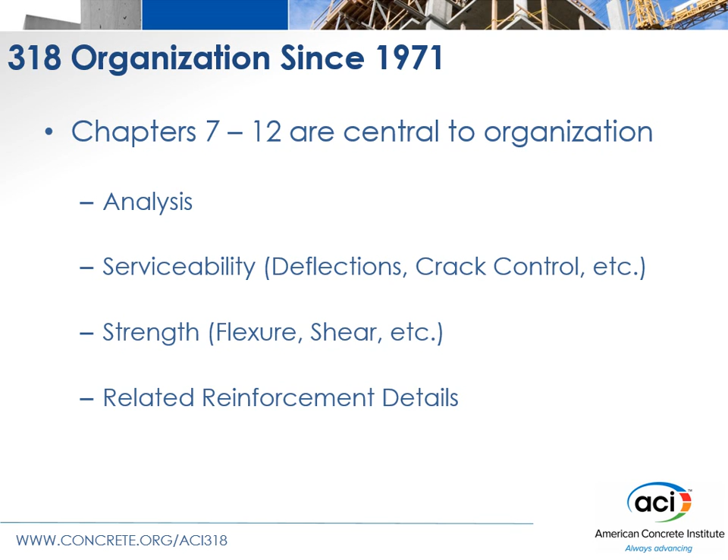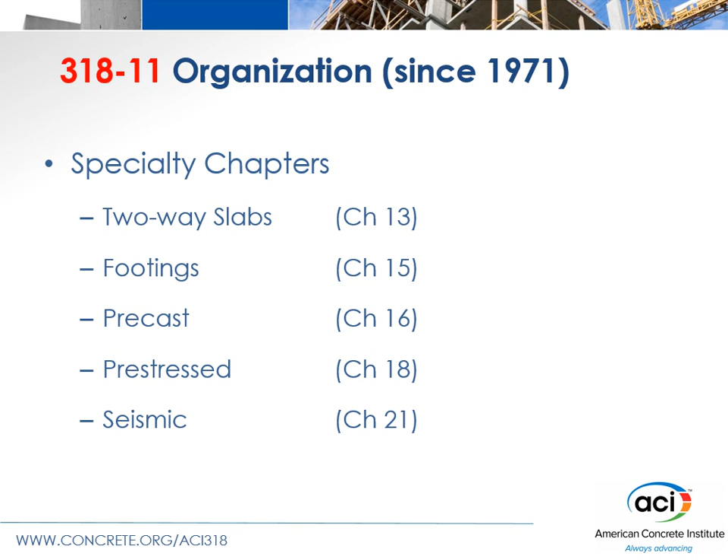As you know, from '71 forward through the 2011 code, the central chapters were 7 to 12. We had analysis, serviceability, strength, flexure, shear, and related reinforcement details. In the specialty chapters, we had separate chapters on two-way slabs and on footings, so we had some structural member design chapters, but then we had different chapters related to various construction techniques, certainly for cast-in-place concrete, but we had separate chapters on precast, on prestress, and a separate chapter on seismic. So we really had, up through 2011, kind of a blend of ideas where we're looking at types of construction systems, behavior, and member types.

So a couple of major goals in reorganizing 318 were to develop an organization that followed the design process. We wanted the user to be able to find the information quickly. And the other thing is we heard that designers particularly wanted to increase the certainty that a design fully met the code. So how do we do that, particularly when you have provisions that are spread out throughout the code?

So the heart of the 318-14 organization is what we're terming loosely a member-based code. The member chapters are in order and have a very similar design feel to them. We have one-way slabs, two-way slabs, beams, columns, walls, a new chapter on diaphragms, foundations, plain concrete members. So that is really the heart of this new 318-14 organization.

And one of the things that ACI staff has prepared are transition keys. So if you have provisions, particularly in notes that you designed by, there are transition keys that will take you from 318-14 back to where you can find those provisions in 318-11, and vice versa: 318-11 will tell you where they're at in 318-14. Those are free for downloading on the website, and I would certainly recommend that you take a look at those. That will be helpful, particularly in class notes, where you referenced a provision and you want to now find it in the new code.

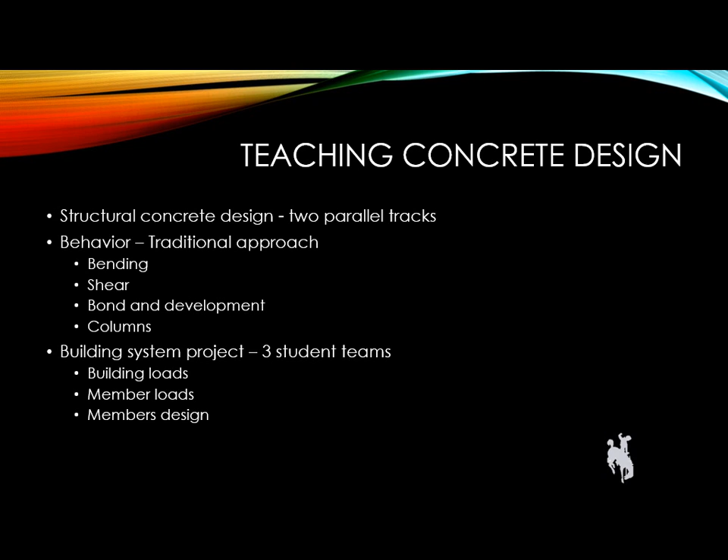To make it work, what I do is I put together a project that requires the students to develop the building loads first, then the member loads, and then to do the member design. And I do it this way because they can be doing the loads while I get far enough along with the flexure part of the lectures that they can actually do something in concrete. And those of you that teach a course know that you've got to get in 2 or 3 weeks before you can begin to do reasonable homework problems, and the students have enough background.

So, as Randy pointed out, the material in the toolboxes, the back chapters, are where you're going to find bending, shear, axial load, the fundamental behavior parts of the code. These are now in Chapter 22. I actually teach reinforcement before I get to serviceability, so bond, development length, cutoffs and stuff are in Chapter 25. Chapter 24 is serviceability. So we're working through this in the project that I do, then serviceability checks come dead last in the process. The next thing I need to do is look at a project. And so for this part of it, I take a building, in this particular case, it happens to be a hospital down near Loveland, Colorado, that I watched go up.

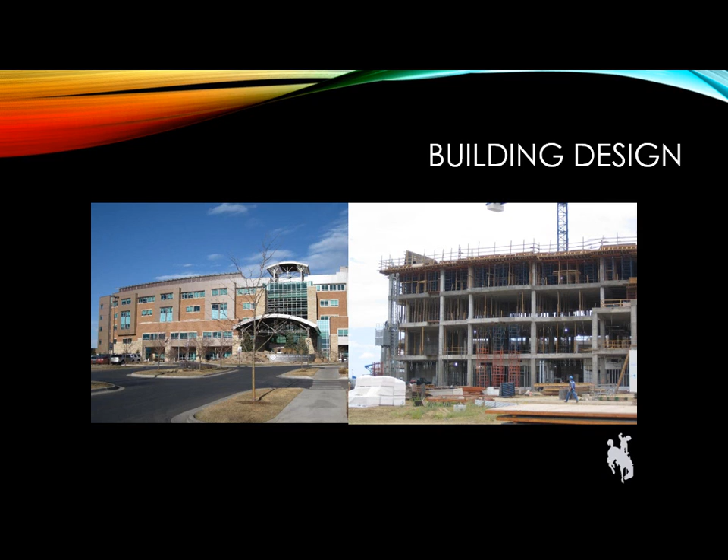We talk about what a building looks like at the end, and fortunately, I was there at the beginning, so we have a series of pictures of the construction of the building. And so the students learn slabs, beams, what these different members do, and a little bit how they go together. So that's kind of the beginning.

I then start dumping this design project on it. All of the students don't like this one because it's a lot of work. Students, not to worry, it's a lot of work for the faculty to grade it too. So we'll go through that.

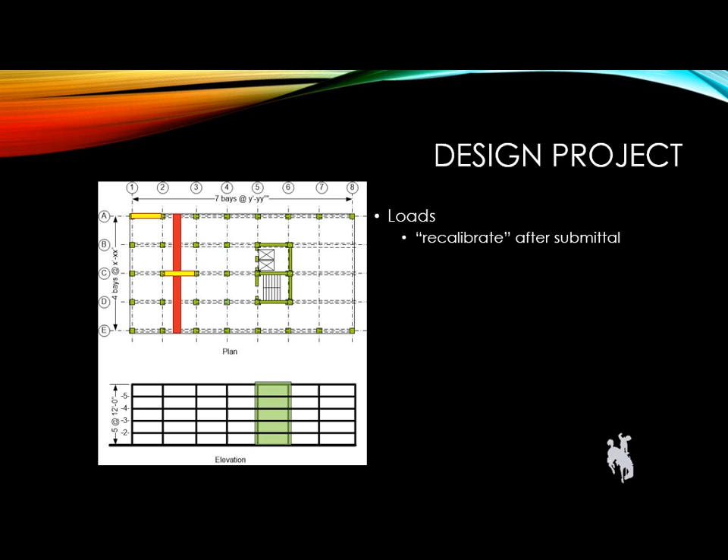Part of the calibration is they have to estimate sizes, so they have to get slab sizes, beam sizes, and all of that, which accounts for some of the variation. Then they do the one-way slab, and I have them use the ACI moment coefficients. A, they haven't had indeterminate structures, and B, I want them to know that the moments add up to at least wL squared over 8. And that's a great surprise to some of them.

After the one-way slab, next I do the beams. I do a couple of typical beams. I take an interior one because it has the two end moments, and then I'll take another one up in the corner that frames into a column, because I'm eventually going to have them look at a column.

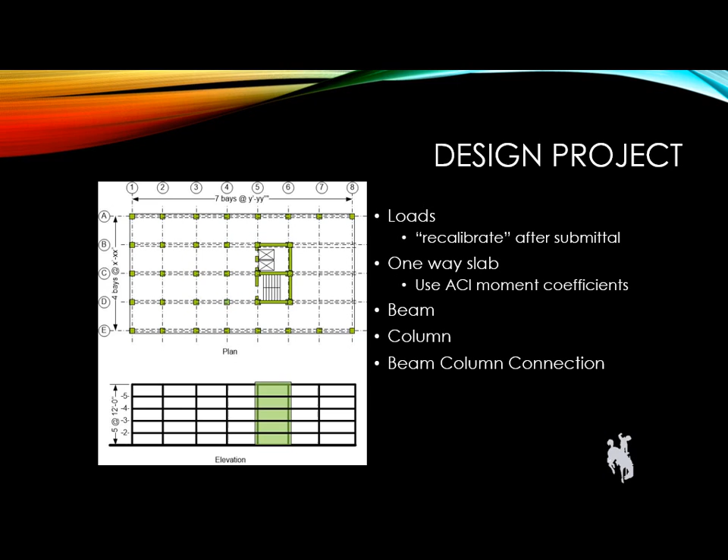For the column itself, I typically take a corner column, and again with a one-way slab, I've got one-way bending on the column, and they've got to work through where the loads on a column come from. So then I have a column that has axial load and moment on it, and we'll look at the column two or three floors down because the top one isn't as much fun.

And I have them do a beam-column connection, so they have to figure out how to get the steel into the column, how to bend it because the column isn't big enough. And they work through all of this. And depending on where I am in the semester, I have them do a simple spread footing so that now they've seen the entire building.

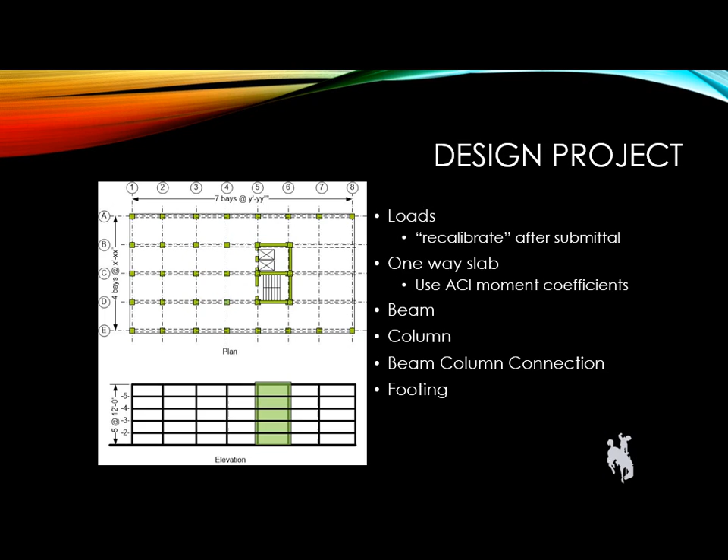From the overall picture, no good deed goes unpunished. I have about half of A through K to report on: complex projects, theory to practice, all of this stuff. But that project gets you into being able to address a number of the ABET requirements.

The member chapters in the new code are going to be a real godsend to this. Since I didn't have the member chapters when I was doing this, everything kind of got put together. With the new code, the students are going to be able to take each one of these pieces they have to do, go to the code, go from A to Z, check off each step, and make sure they have all the parts done. So I see this as a major benefit of incorporating the code into the class.

Grading a project: if you're a faculty member and you're saying, how do I grade 40, 50 individual designs? What I ended up doing was a peer review within class. They pass in all their reports on each submittal, I pass them back to a different group, I give them a checklist and say, grade it for me. And I will post on the board or give a handout of approximately where the answers should be. And so I expect them to come back and learn.

One of the things that happens is by the last submittal in this class, they're starting to look pretty good. They've learned what real garbage looks like courtesy of their colleagues, which the faculty know, but the students don't always see. And in my own case, I have a MathCAD program where I just change a few parameters each time and it gives me the full set of solutions.

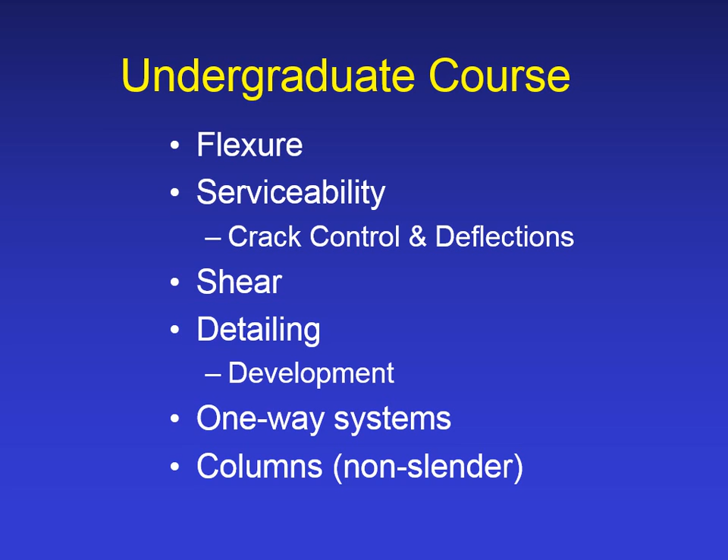And then finally, at the end of the semester, we really have about a week or 2 weeks to cover columns, and we only do non-slender columns in that portion. Slender columns are held for a graduate level course. So going back into this, one of the first things that you introduce to the student is the materials. And you say, hey, here's the concrete and here's the steel.

So in the new code, we have these chapters that start at 19 once we pass the members. And the first one is concrete. The title's a little longer, but it's focused on the properties of concrete. I find that this code lays out very well into the way that you would teach the class, that you can get into here and start to tell them about f'c. The properties are defined. What's the E? What's the modulus of rupture? And if you're talking about lightweight concrete, there's your lambda. So it gives them that knowledge about the material and how we specify the concrete.

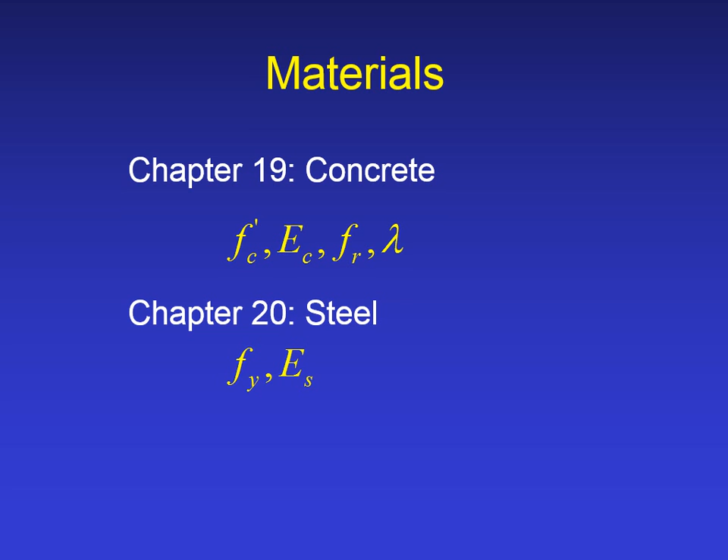Chapter 20 follows up directly with steel. This is where you have your fy, E of steel. If you're teaching a prestress class, it has your properties for the E of prestressing steel and some other material properties for the steel. So I think those two chapters are very good to go along with the material section of your course.

And then I'm starting to really get into flexure now. As I start talking about flexure, or these material behaviors, that's where these toolboxes come in, and I think, before just jumping into one of the member-based chapters, understanding that toolbox structure is very important to teaching the students how those toolboxes work and the behavior. As was shown already, we have chapters 21 through 25, which are kind of the meat of these toolboxes. We have the strength reduction factors, and sectional strength, chapter 22.

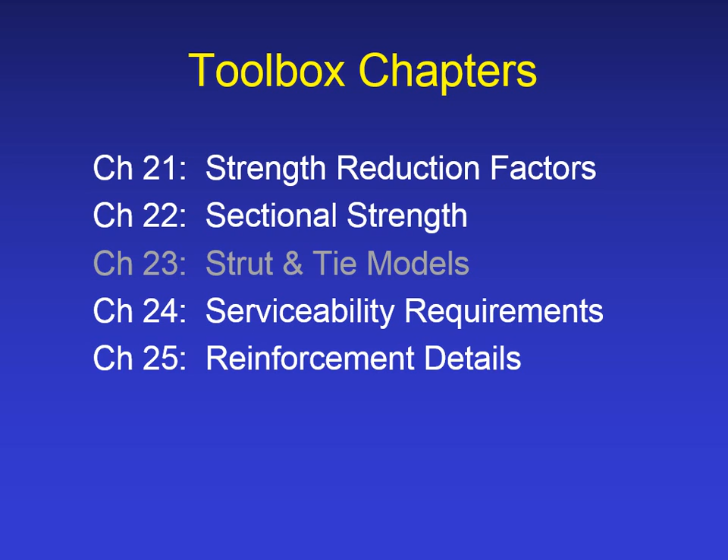And I just highlighted so we didn't leave it out here, but strut-and-tie modeling would not be covered, obviously, in the introductory course. But getting into serviceability, that's one of the major topics. And then the reinforcement details. So it follows very well along the typical topics that we would cover in an undergraduate course. So I wanted to get into just a couple of the chapters.

So as I'm looking now in particular at teaching this behavior aspect in flexure and shear, this Chapter 22 on sectional strength is just perfect because I have design assumptions. And in there, we're covering the design assumptions for moment and axial. And so that's where we're talking about the 0.003 strain and what are our assumptions that we use for design, which follows with 22.3, flexural strength.

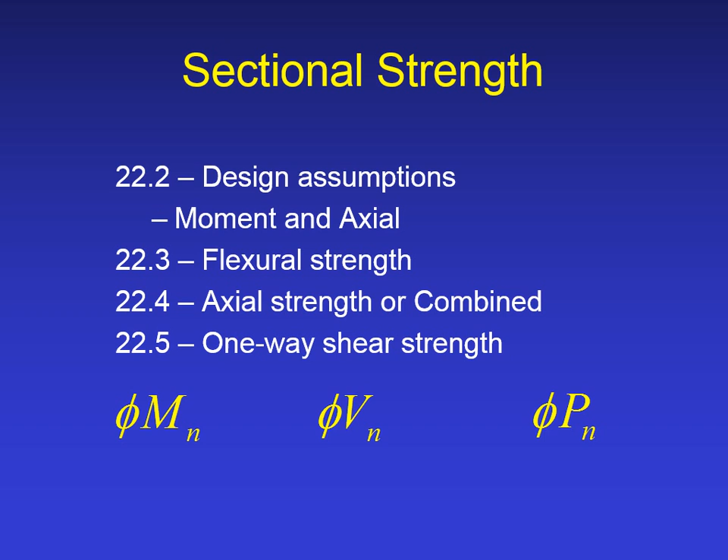And when I finally hit the columns, it has a section on axial strength or combined, where I'm doing my interaction diagram. And so again, understanding how to navigate this toolbox, I think, is fundamental. And then if you're doing shear, which is the one-way shear, which is going to be covered in the course, there's the section. So you go right into that, and now they understand how to get their nominal capacities, and then applying Chapter 21 right before for their phi factors.

The member chapters are great, as Charlie was mentioning, because now within one chapter, everything that they have flows together, whether I'm doing a one-way slab, a beam, or a column. So those are the chapters that will be used throughout this course, in particular when I'm getting to the design project, similar to what I think Charlie was indicating. So when I'm bringing in the continuity and how to put this whole project together, you can step through the one-way slab design, and all of the pieces from start to end are going to be there. For beams, the same situation. So the member chapters really guide the way for the students of how to design that member.

And I want to show a little bit of the details in that common outline. So all of the member chapters follow this outline. We start with the scope of the chapter and some general thoughts about the member. But then we get into design limits. So, for instance, how thin can the member be as a minimum if I neglect deflections? Any of these type of limits. And then the required strength. What are the moments that I have to design for? Mu, which is going to refer them to the appropriate parts of the code.

The design strength, the phi Mn, directing them now to the toolbox. So they understand now the interplay. So once they understand that toolbox, you can really navigate through these member chapters. And then the reinforcement limits. So minimum amount of flexural steel, minimum amount of shear steel, and then finally the detailing that's required for that member. So really an integral part of trying to do a project where you're designing the entire member.

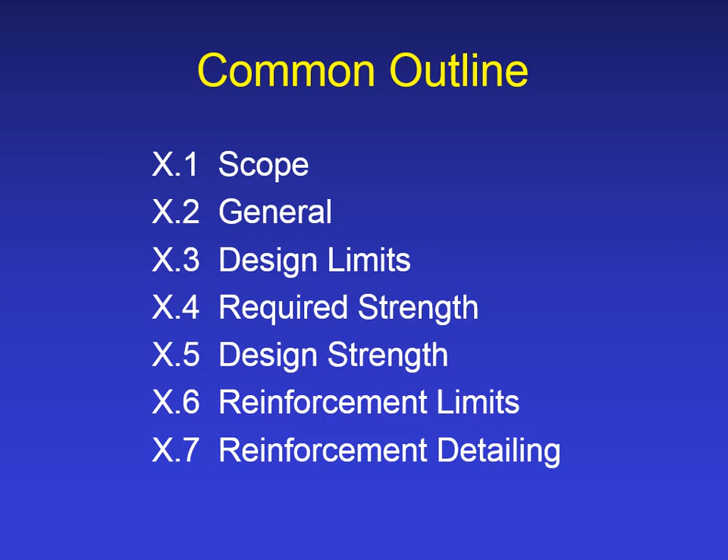And so a couple other things I wanted to mention, especially as you're starting to do these type of projects, and again, when you're giving them just calculation type problems of doing a member and trying to calculate the forces on it, there's Chapter 5, which is the loads, and that gives you your load factors and combinations. So that's the major section that you would be referencing. And then the structural analysis. And I wanted to bring up two sections that would be the real pieces that you would use inside of your typical undergrad course. In simplified methods, that's where we have these moment coefficients that Charlie was mentioning.

And I strongly believe whenever I teach that course that they need to understand those coefficients, because they will go through and run finite element analysis programs and get all types of forces out of it. They have no clue if those forces are right or not. I make them check it with these simplified methods to understand the ballpark, and they should have a feeling of what those answers should be before they even run the structural analysis. So I use those, and I'm very glad we retained that in the 14 code, that we didn't just say, well, we can just do structural analysis with a computer. I think they're very valuable tools, and I stress that in the class.

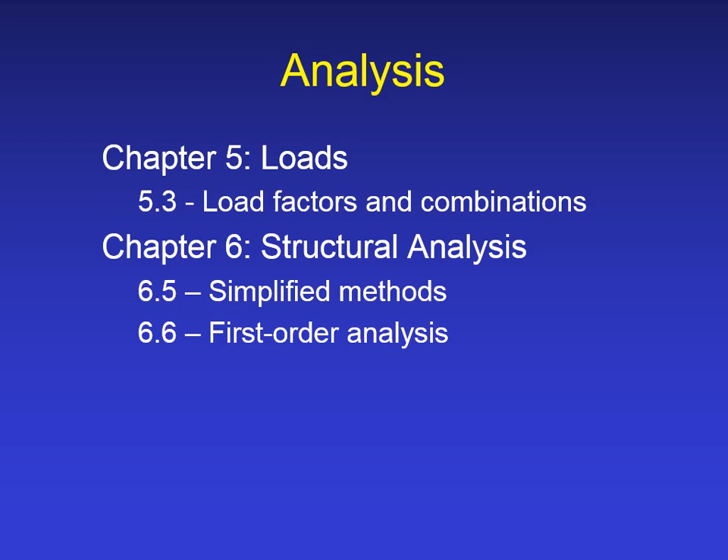And then there is the first-order analysis procedure. Obviously, I'm not going to get into second-order analysis in this introductory course. So that is very compact in sections 6.5 and 6.6. So finally, to get to the whole piece now, after they understand the strength, much like Charlie, I later on get into the serviceability of deflections and the crack control. Those are contained in a couple of sections now. And then the shrinkage and temperature reinforcement you'd utilize.

So I just wanted to mention one word on a graduate course, since we're talking about just generally teaching. Once they have that basic outline and understanding how the toolbox chapters integrate with the member chapters, a graduate course, and this is an example of the topics that I cover in the advanced concrete course: slender columns, torsion, two-way slabs, beam column joints, and strut and tie modeling. Each of those follow exactly that.

We have a chapter within Chapter 6. That's where the slender column analysis procedures are outlined. It's in the analysis chapter. Torsion has a section just for that. Two-way slabs, we have a whole chapter that outlines that. It has the equivalent frame method, direct design method. We have a chapter that's specifically about beam column, slab column joints, and I cover that in the course.

And then strut and tie modeling. The entire chapter, which was formerly an appendix, is now there. So I think that one is very simple to integrate once you understand that other piece of how the toolboxes integrate that you would gain out of your undergrad course.

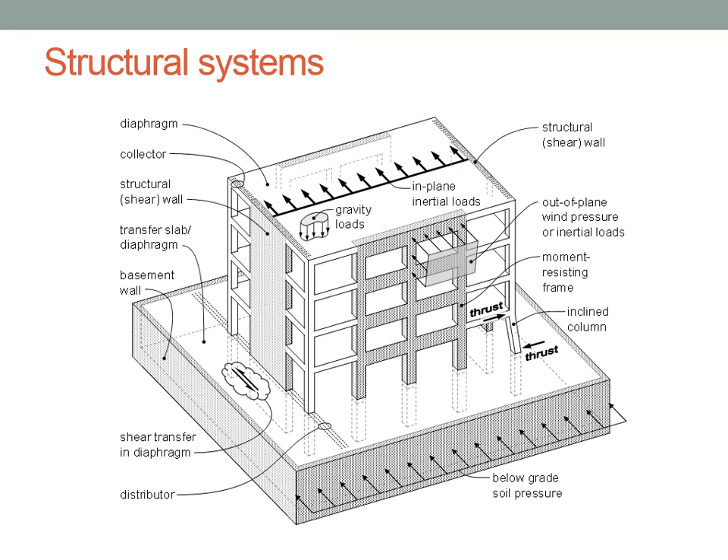And I think it's really important that this new code takes the time out to actually explain that what you're designing is not beams, columns, slabs, and so forth. You're designing a structural system that's going to hang together under whatever the loads are that get thrown at it. On the West Coast, we're mainly worried about the earthquake loading, and so we're worried about seismic framing systems and diaphragms and things like that.

The things that strike me about the new code are things like the fact that there's a diaphragm chapter. For the first time, we have a chapter on diaphragms that's applicable to all sorts of buildings. We've always had diaphragms in the seismic chapter, which used to be 21 and now it's 18. But now we talk about diaphragms in general, because diaphragms are not just a thing for earthquake resistance. The diaphragm's what keeps your building together. It makes sure that your frames and your walls, which are sort of typically planar, actually stay in their plane. Okay, that's what the diaphragm does.

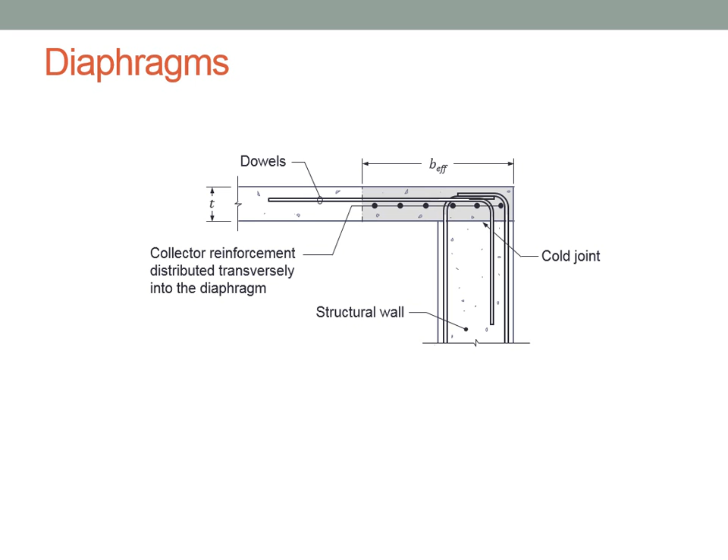And so the fact that the new code talks about this for the first time is really important. And the fact that it talks about the system and what the requirements are is really important. And that should be part of what's taught, I think, in every class, undergraduate to graduate. And we do this on the West Coast because if we don't have a diaphragm for building resisting earthquakes, we're in big trouble.

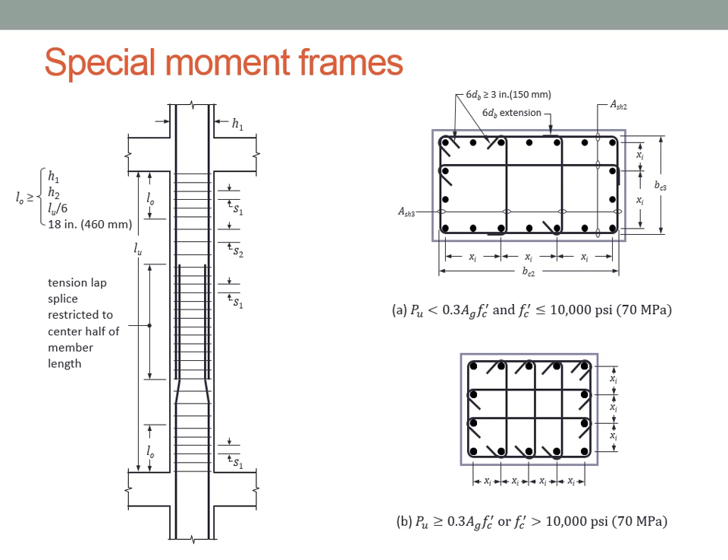The new code also, in its seismic chapter, has updated some of its provisions, very importantly. And so the new code is not just organized in a new way, it has some new things that are really, really important. And I'm so happy that when I teach the Reinforced Concrete Seismic Design class at Berkeley, I don't have to make excuses anymore about the column confinement provisions. I'm so happy that the column confinement provisions actually recognize that the amount of confinement should vary with the amount of axial force. And it's great that it does that. And there's lots of other important technical changes that have gone into this code. It's not just all reorganization.

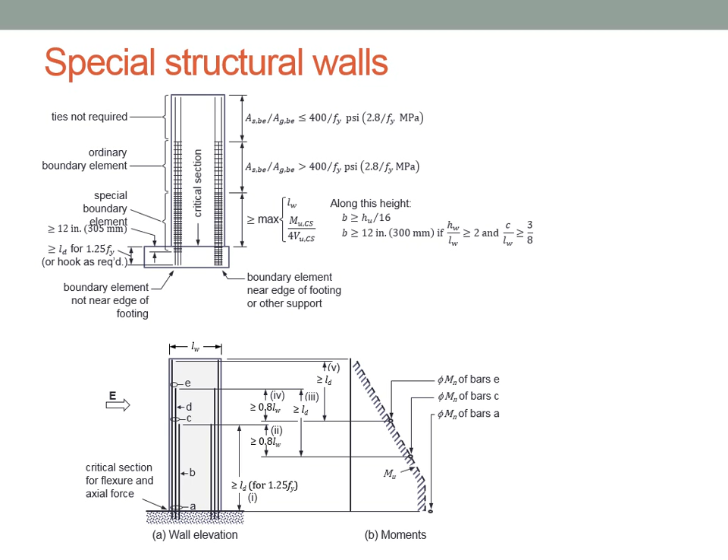And in foundations, we worry a lot about foundations out west because the loadings are so different. And it's great to see that the strut and tie method has been elevated to its own chapter. It's in the code now instead of in an appendix. And one of the things that we didn't really get time to do in the last code cycle was to update a lot of the foundation provisions.

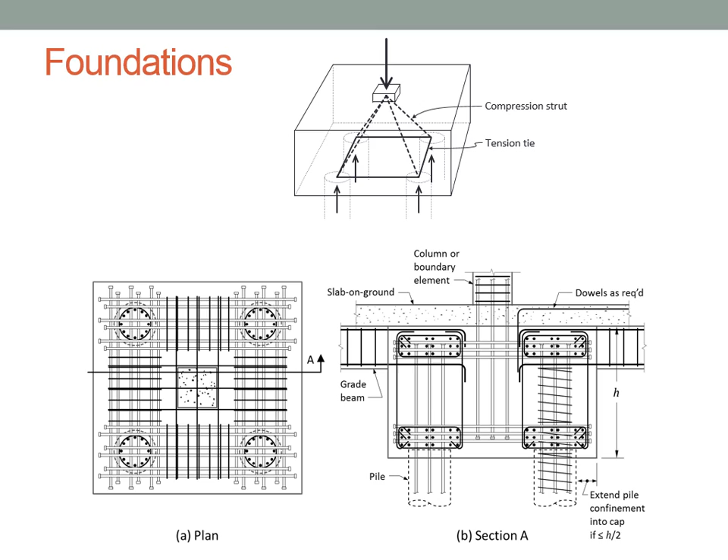But one of the things we're aiming for the next code cycle is really to get these things updated. And to see how things really come together is great. And so I love seeing pictures of real buildings coming together and what gravity framing looks like.

And when we teach a reinforced concrete class at Berkeley, we talk about how the gravity frame works. It's not just the shear walls and the frames and the foundations and the diaphragms, but all the other stuff that goes with it. And I think it's great that this code is organized to bring all those things together.

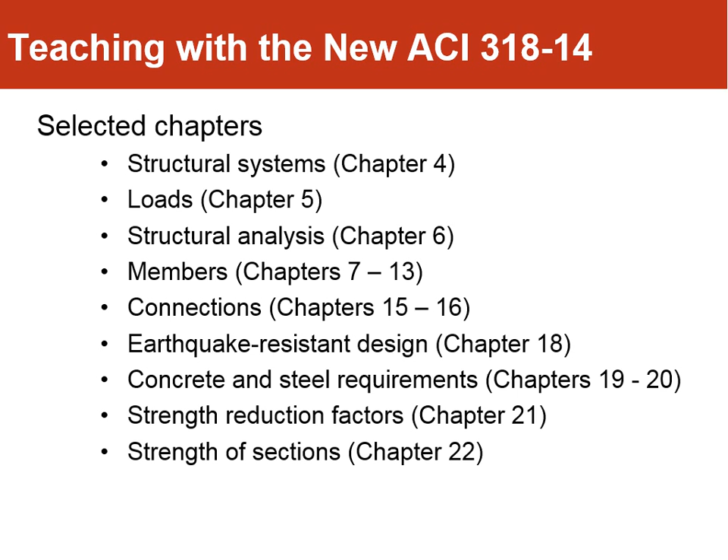Randy and others have talked about the distribution of topics throughout the code, so I'm not going to spend much time going through this, but the one thing I will point out is the member design chapters, chapters 7 through 13. We have connections, and then some of the toolbox chapters, things that apply to different types of members, strength reduction factors, strength of sections, and concrete and steel requirements.

Now, within each chapter, though, at least the ones that refer to the design of members, there is a common theme or a common sequence of provisions. It starts typically with the scope, the application of the provisions of that particular chapter, some general requirements, and then design limits, strength requirements, required strength and design strength, and then it goes to the limits, reinforcement limits, and reinforcement detailing.

Now, I think it is key to understand how each chapter really works, and one big thing in this code is that all design requirements for a given type of member are present in that member chapter. The requirements themselves may not be explicitly mentioned there, but the need to satisfy a certain provision is there in all the design chapters.

So the main concern that we had in previous codes, that people were not quite sure that they were done with the design of a member because different provisions were in different chapters for the same type of member, well, that's gone. So that is something that is very important.

Now, the other thing is, well, what should we expect to have in a design chapter in terms of the explicit provision versus a toolbox chapter? So we have to understand that when you have provisions that apply to different types of members, then we shouldn't expect that provision to be in the chapter itself. There will be a provision that tells you you have to satisfy this, but the actual requirement or the detail of the requirement will be in a toolbox chapter.

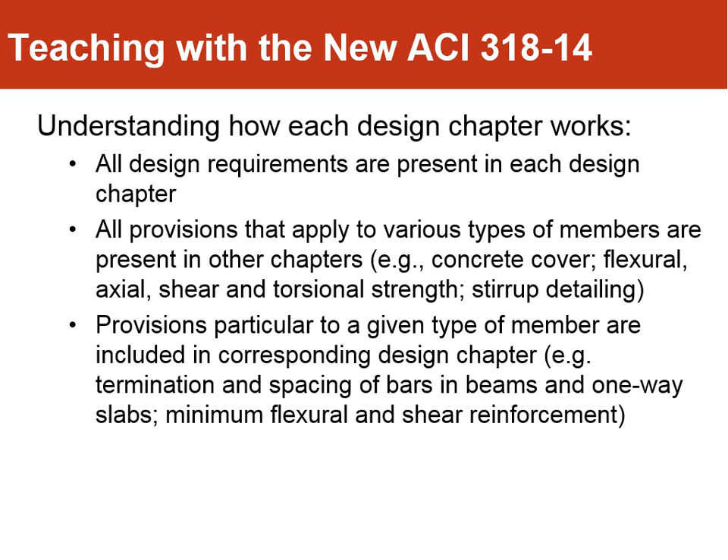Now, from a designer's perspective, I would say that the single most important improvement in the code is the fact that you can feel confident that once you go through the entire member design chapter, for whatever type of member you are dealing with, you are going to be done with the design of the member. That was one of the biggest concerns prior to this edition of the code, and I think that was one of the main drivers behind the decision of reorganizing the code.

Now, from a teacher's perspective, or in this case also from a textbook writer's viewpoint, one of the things I've encountered quite a few times when you're dealing, for example, with beams or columns, is how do you refer to the requirement? You may have a certain requirement that is actually in the toolbox chapter, but the requirement to be satisfied in columns is in the columns chapter, with a reference to a toolbox chapter.

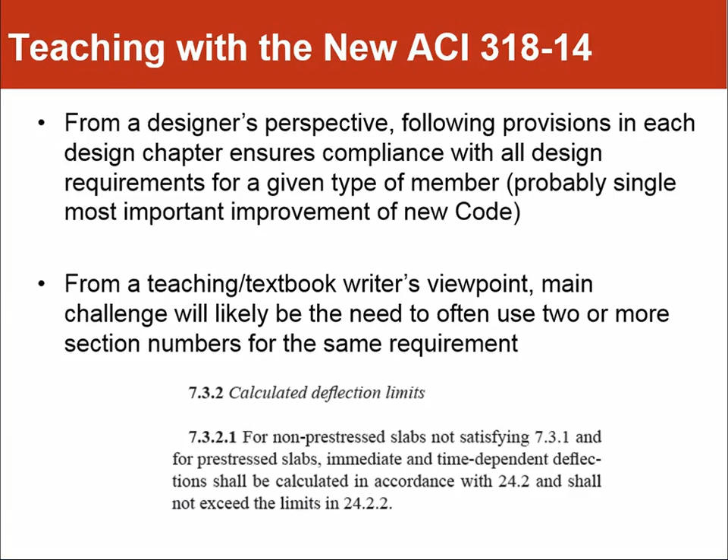I wasn't exactly sure what to tell you about teaching reinforced concrete design that you don't already know. A lot of people have said there have not been that many technical changes in the code, except, as Jack said, some nice changes in the seismic part. Some people have asked me, oh, you're going to have to completely rewrite your book, and I don't think so, because I'm going to teach pretty much the same way that I have continued to teach.

Now, some of you in the room might be feeling like this: my class is starting in 2 months, shortly after January 1st, and I just today got a copy of the new code. What should I do? Well, I've been teaching a graduate course this fall, and the code hasn't been available yet, and I'd just like to tell you to relax.

My thought is flexural theory has not changed. Shear analysis and the design procedure for shear has not changed. If you're going to do straight or hooked bar anchorage, those lengths have not changed. So I don't think you need to make a wholesale revision of how you're going to teach a reinforced concrete design course. You will need to get straightened out as to where these things have gone.

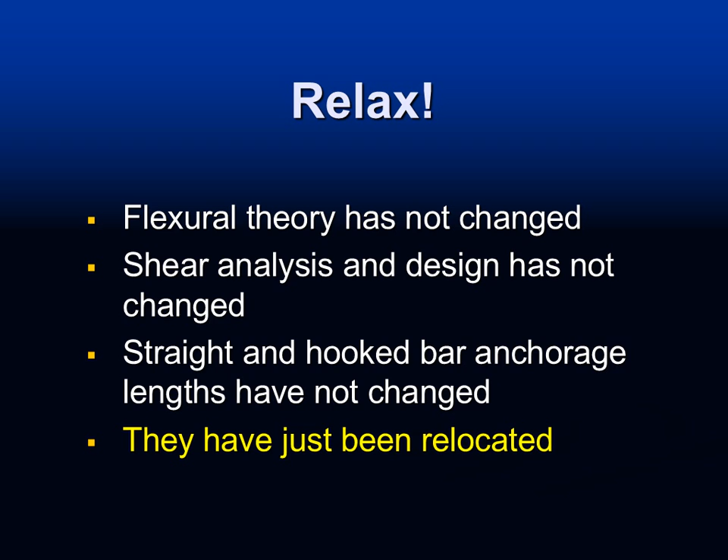And again, more than likely, when you're teaching flexure or shear, you might tie that into a beam design. You might tie it into a one-way slab design. When you're hooking bars, you might tie that into either one of those members. So I'm not sure that there's going to need to be any sort of a wholesale change in how you teach these things.

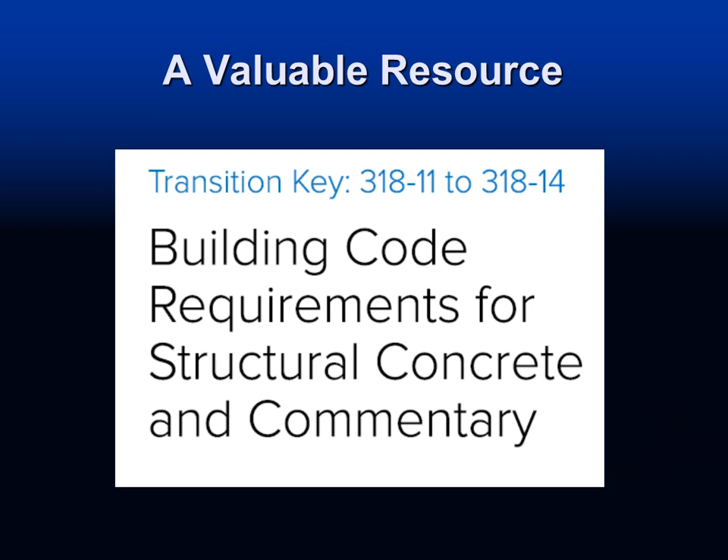One of the things, and Randy, you brought this up, and Khalid, you might talk more about it, something that's been very beneficial to me over the last summer as I've been trying to update my book. One of the most difficult things, and Gustavo was getting at that, is to get all of the code references correct because they are all different. And this transition key that the ACI engineering staff put together was available right around, I believe, the 1st of May, about the same time the code went out for public comments. This is an extremely valuable resource to those of you who might be updating your existing notes or something like that.

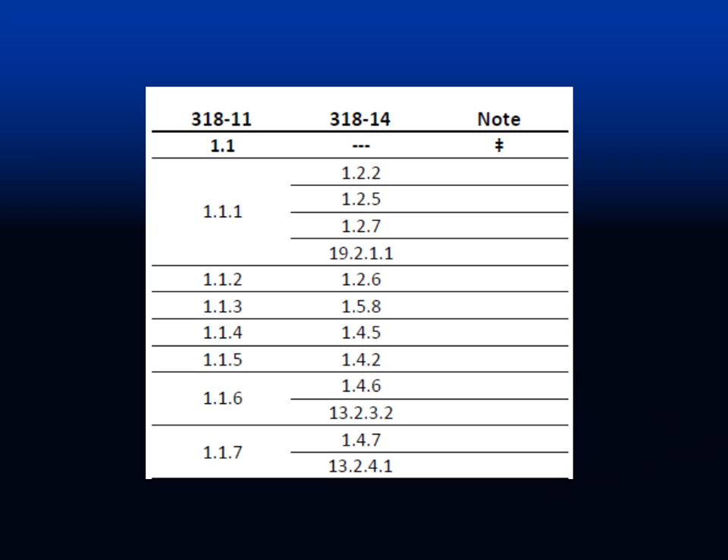And again, as Randy said, we have here a couple of columns where something was in 318-11 and where it now appears in 318-14. There also is a listing of notes, but Khalid, I didn't notice many notes there, so you're kind of on your own. But this I found extremely useful and also extremely accurate. I only found a few things that I didn't think were correct, and I tried to let the engineering staff know about that. This is something, for instance, that I'm doing in my notes this fall when the students don't yet have a copy of the 318-14 code.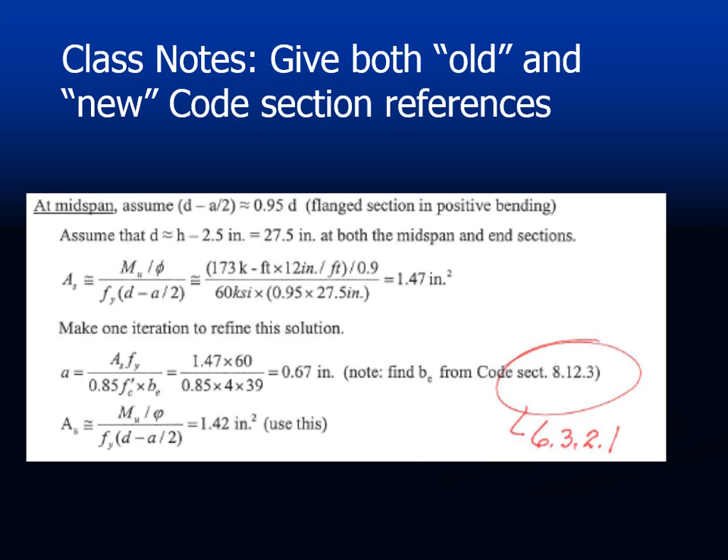It's kind of irrelevant what I'm going through. I'm doing an iterative design of a flanged section in flexure, in a positive bending region. Part of that iteration, I need to calculate the value for a, which would be the depth of Whitney's stress block, and so I need to know something about the effective width of the compression flange. That used to be located in Chapter 8. It's now found in 6.3.2.1. And so the notes that I'm distributing to my students look like this. I've just gone through and edited them without necessarily correcting them completely yet. Maybe in another year I'll have to just forget about referring to 8.12.3.

And also, this is a graduate class, so we are into two-way slabs, and we might be calculating deflections and having deflection limits, which used to be in Chapter 9, but now those are given in Chapter 8, which is for two-way slabs. But the interior of the table has not changed. So like I said, a lot of the technical details about how you design and detail reinforced concrete have not changed, just things have been relocated.

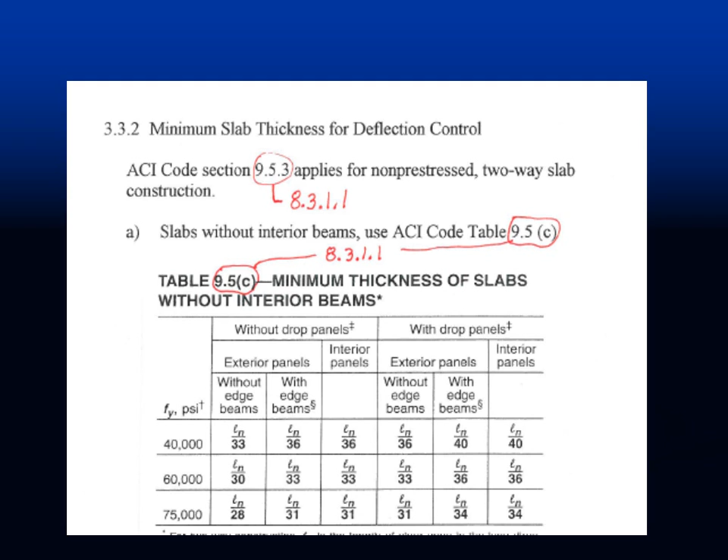So this is something I might suggest to you if you're starting to teach your course in 2 months and you don't have time to rewrite all of your notes. Do a little work with that transition key, and I think you can get things straightened out a bit. You do run into a situation where you might have one thing listed in 318-11, 7.6.5, and then suddenly you've got 4 references in 318-14.

Well, remember, we have member chapters, and as Gustavo was pointing out, you have some of the same things you do for every member. This is actually related to minimum or maximum spacing, I think, on flexural reinforcement used in slabs and walls. It was nicely contained in one section. Now it appears in Chapter 7 for one-way slabs, in Chapter 8 for two-way slabs, and in Chapter 11 for walls. So again, it's just been relocated.

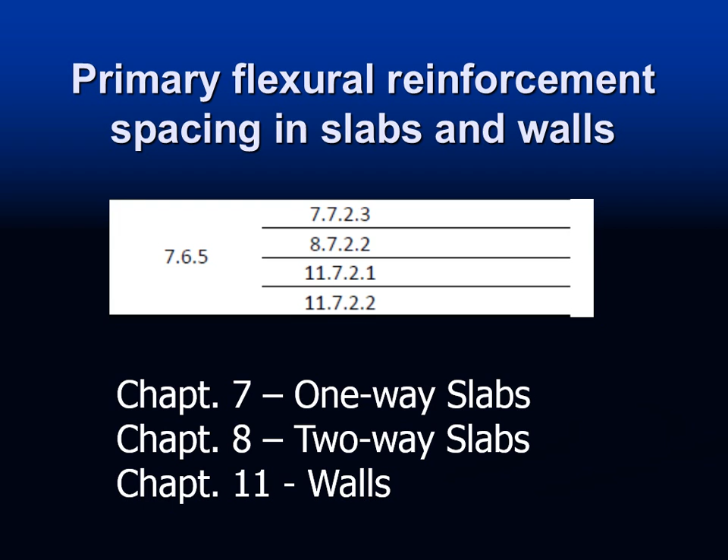In my graduate class, I teach a bit about structural walls. So if I come across this provision, I'll be referring to Chapter 11. I won't be giving them the reference for one-way slabs or two-way slabs if I'm talking about walls. I would just give them the references in Chapter 11. So you have some of that. Then you have a few of them that are really difficult.

So again, Matt, I see you out there. Thank you very much, Matt.

I think this has been a very valuable resource to me as I've tried to put together an update of my textbook. So, as I said, relax. There will be an adjustment period that you need to go through as an instructor. You're going to need to learn where everything is in the code. And, as many people have said, the students are going to have to understand how the code is laid out. But every time they come into the first course in reinforced concrete design, they've never seen the code before. So you need to teach that anyway.

Use the resources that are provided by ACI. Now, I've just talked about one resource here in my presentation. I think, Colin, you're maybe going to talk about some other resources that may be available. And then also, I don't know exactly, but new editions of the textbook, I'm assuming, are going to be out and available by next fall. And Jack, I guess yours is already available, and I couldn't tell quite, Charlie, if yours is available January 1st or May 1st.

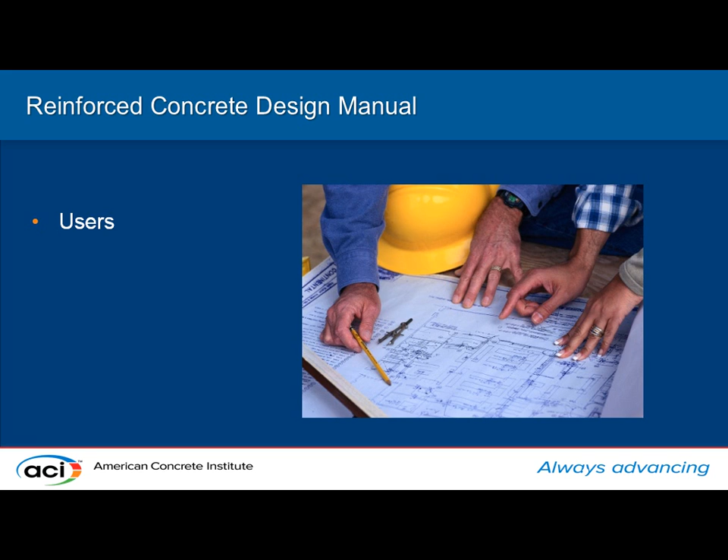This manual is directed towards professionals who are infrequent users of ACI 318 and are interested in the design and construction of reinforced concrete buildings. It's also intended for students who have completed structural analysis and design of strength of materials. The worked examples may be a good resource for a concrete design class, but the discussions assume that the user has a working knowledge of reinforced concrete design.

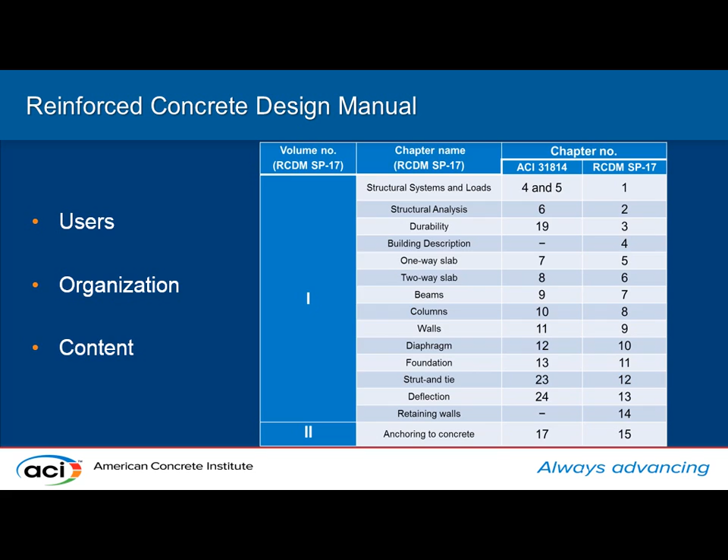Organization: the way this manual is organized is following ACI 318-14. Here you'll see the content. Here are the topics. They are mainly all the member chapters, and here's the ACI 318-14 chapter numbers, and here's the manual chapters. So we're following more or less the same organization of the code. The first 3 chapters follow the code, and they are not example-based, but provide context of these items as they are related to reinforced concrete structures. They are sort of a refresher: general, concise information that is located in one place and can be read in one sitting.

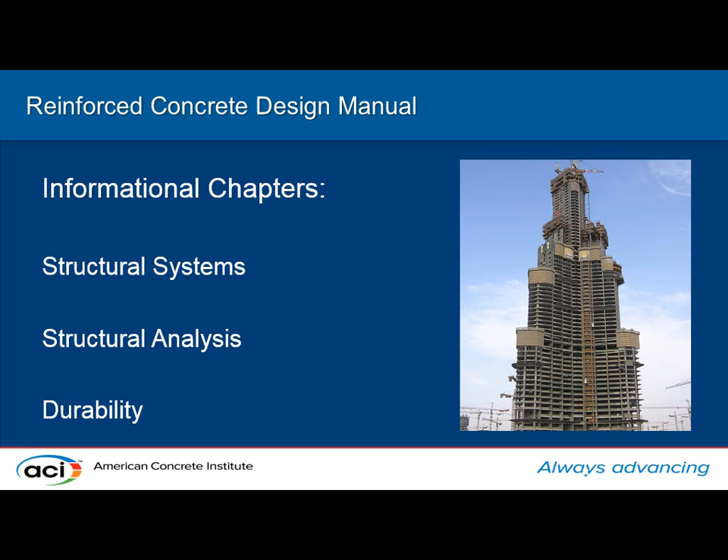Structural systems. ACI 318 added a new chapter that provides minimum requirements for reinforced concrete buildings. It is sort of a roadmap to the rest of the code. It provides minimum requirements for design and detailing of reinforced concrete. A structural engineer's main responsibility is to design safe structures and to ensure that the supporting system can support the gravity and lateral loads.

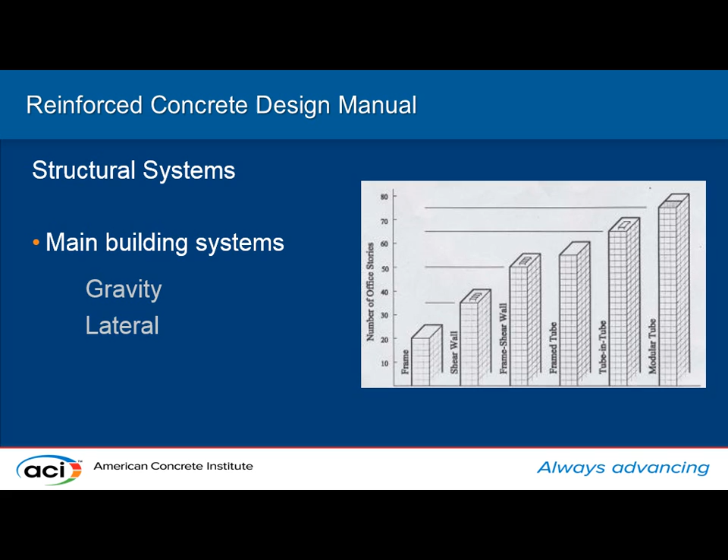Excuse me here. So the chapter on structural systems in the manual provides an overall review of the main structural systems in current building practice. There's also quite a bit of discussion on floor assemblies, one- and two-way slabs. There's foundation, strength, serviceability, durability, integrity, QA and QC that will help the engineer when they're going through their project.

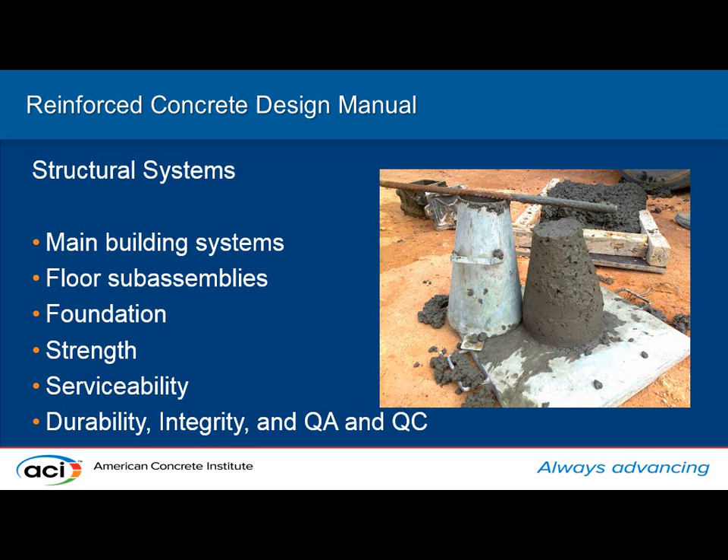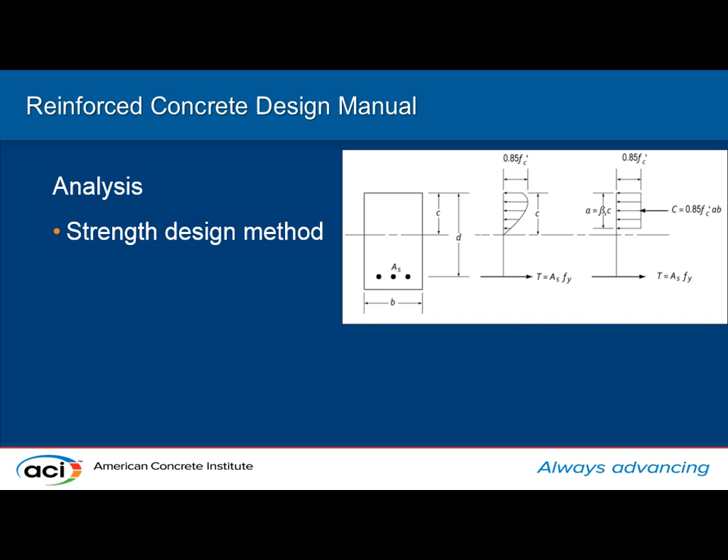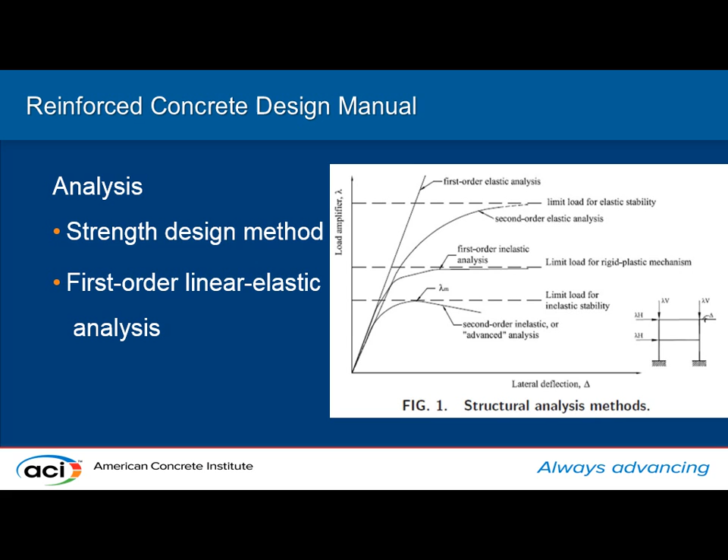Analysis. Elastic analysis is required to determine the design forces and deformations in your members. And the structural engineer's responsibility is to design safe structures and make sure that the design strength of a member exceeds the factored design loads. First order linear elastic analysis has been the most common discussed method of analysis over the history of the code. ACI 318 has been placing simplified methods to aid the engineer or the designer in designing his structures by using hand calculations.

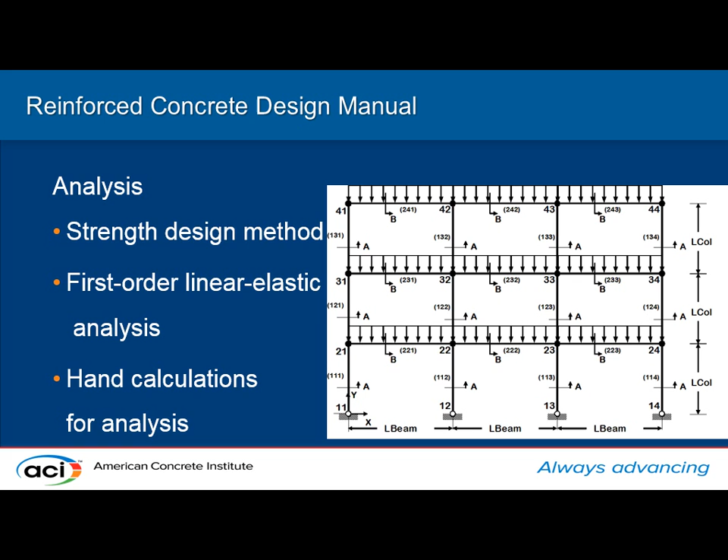Today's powerful computers have made those simplified analysis methods sort of not necessary, but they still remain in the code, as I mentioned, to help the designer design simplified structures, like in this case here, using the portal method.

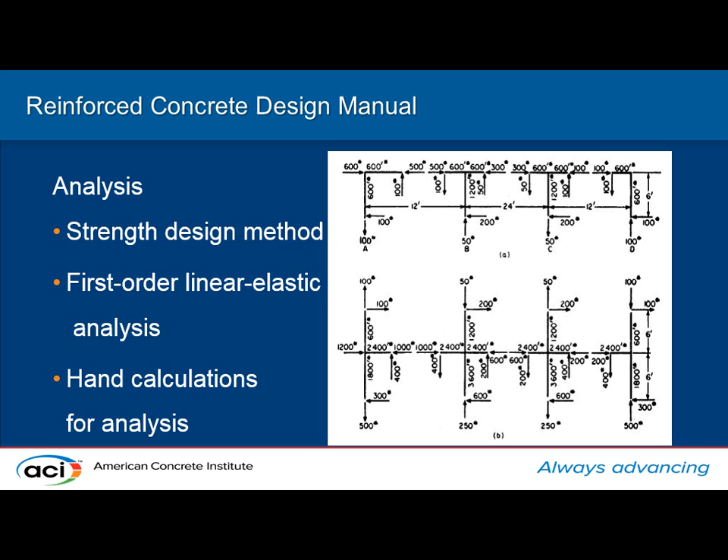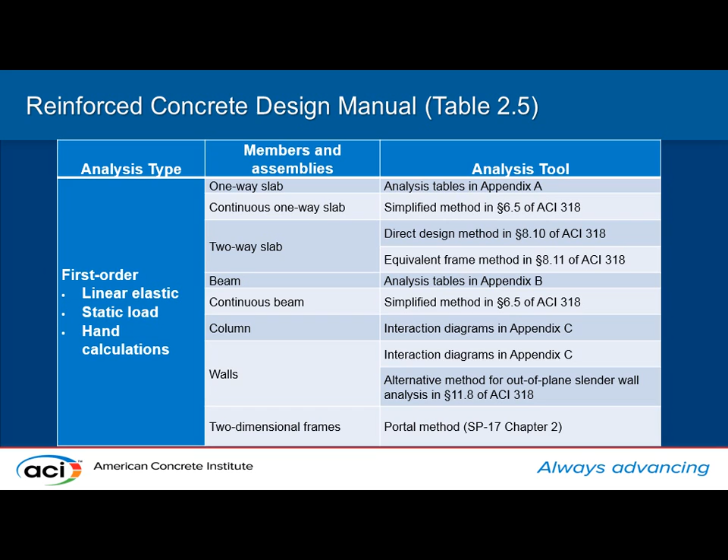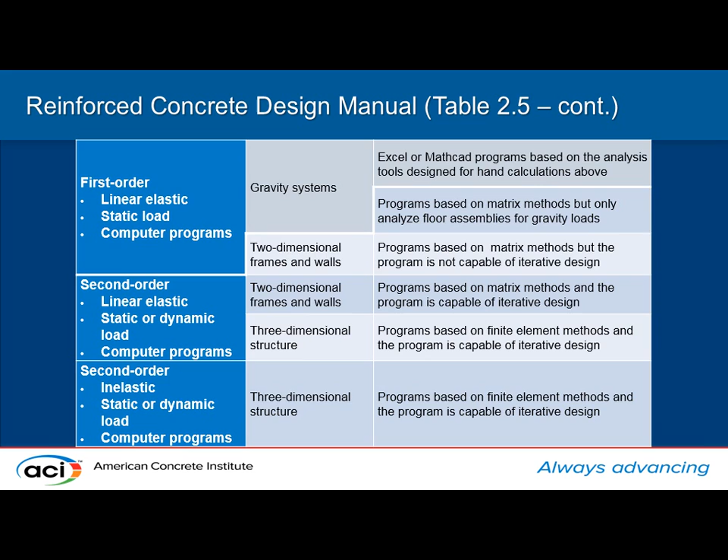So overall, the chapter in this manual provides an overall review of the different analysis methods that are out there. Here's a table from the manual where we have the different member chapters that use the hand calculations, and where they are located within the code or the manual. Here are also the other analysis methods that use computer programs. I will not go into those details.

The structural systems chapter references materials chapters 19 and 20 quite frequently. Because of this, the material chapters are considered toolbox chapters. Before starting an analysis, the engineer must choose the concrete and reinforcement properties. Those are usually given in the code, but

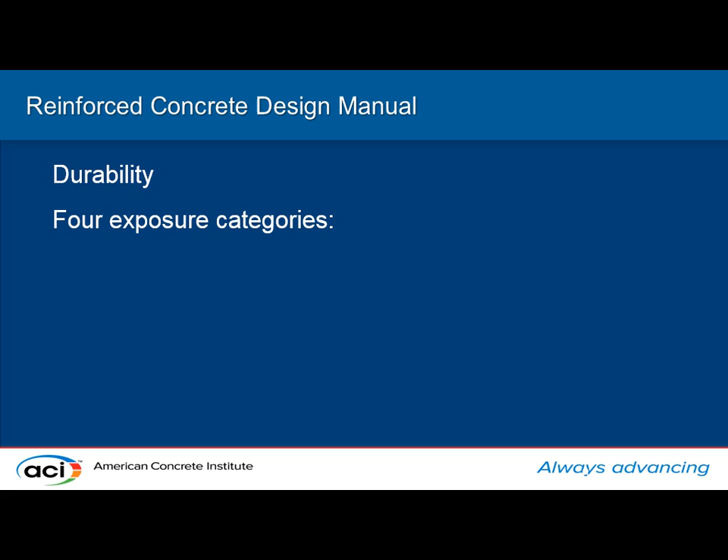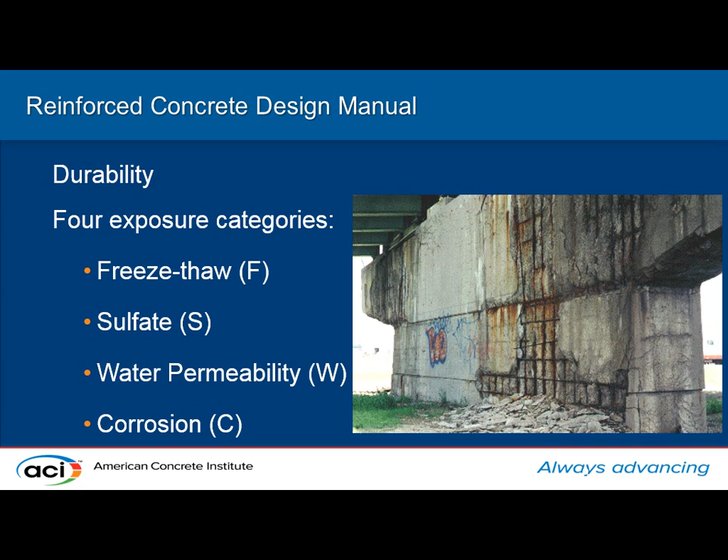an engineer may not be familiar with concrete durability. So in this manual, we added a durability chapter that explains exposures that may be used in a building structure, where we have here freeze-thaw, sulfate attack, water permeability, and corrosion. This chapter may help the engineer in deciding what exposure to use and how to use it, especially in a building that is in service, and to determine the surrounding environment.

For this, we used a 7-story fictitious building that has columns, walls, shear walls, two-way slabs, beams, girders, transfer girders, and we used examples from this building in each one of those member chapters. As you also see here, we have a retaining wall chapter; although it's not a member in the code, we added it. As I mentioned, at least one member is included in each member chapter, but we also have other examples to explain the different code requirements.

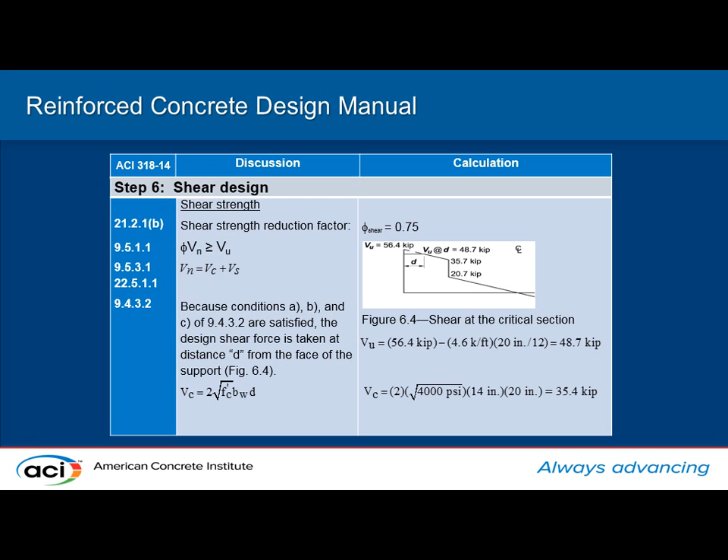The way an example is presented, we have a small discussion text that provides key points to refresh the user's knowledge of the main key points in that chapter. The example has a problem statement, a solution, details, conclusions. The problem is presented in a 3-column format. The first column shows the code provisions, the second column has the discussion, and the third has the calculations.

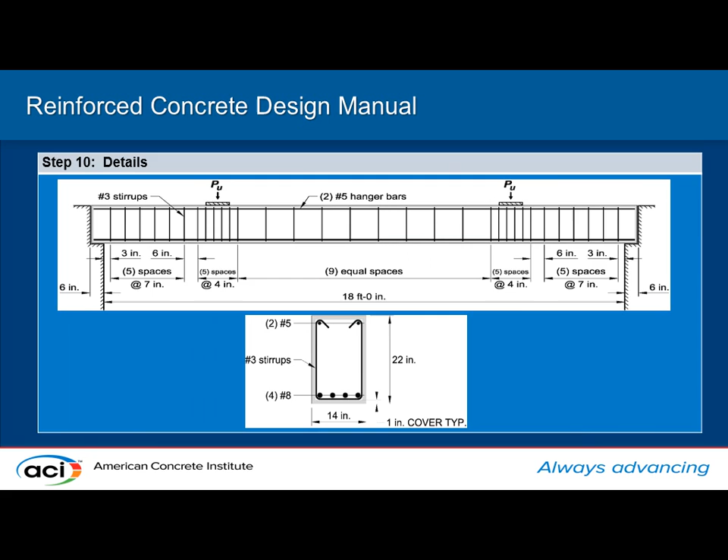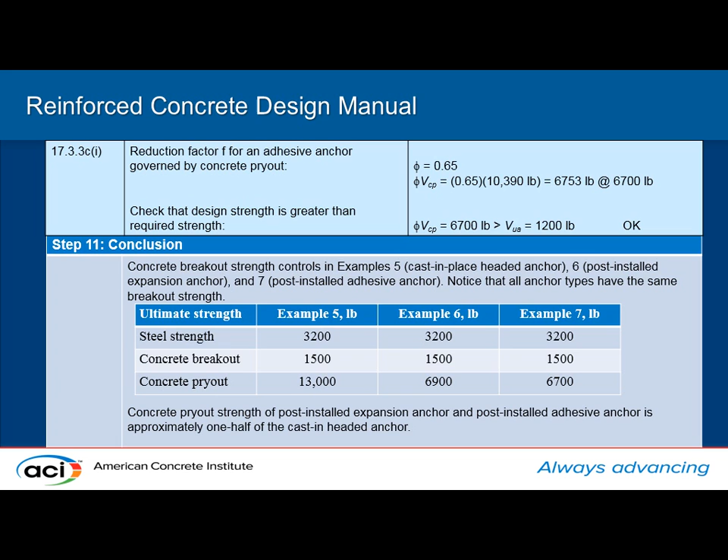Next, we show the detailing of a member. And where it's relevant, we have a conclusion at the end of the problem to point out main issues related to the problem or to other similar problems. Like in this case here, we have anchorage problems.

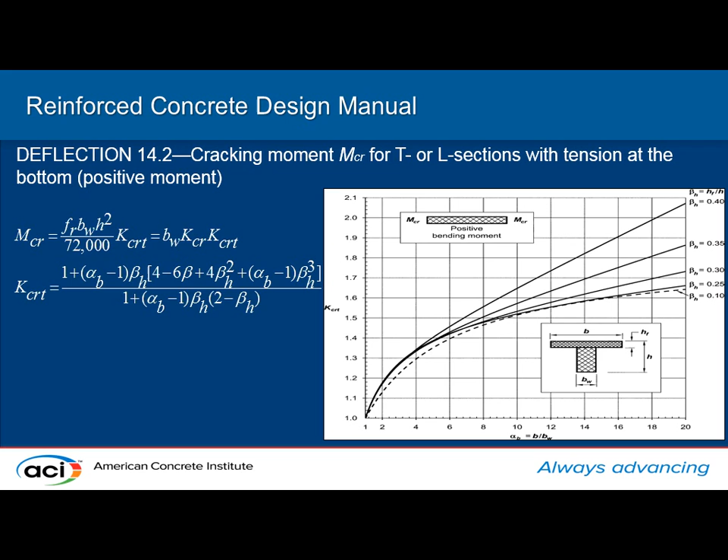This deflection chapter is more of a design aid chapter. In some cases, you have to refine your calculations for deflection of a T section, so we have figures and tables for I cracked and M crack moment.

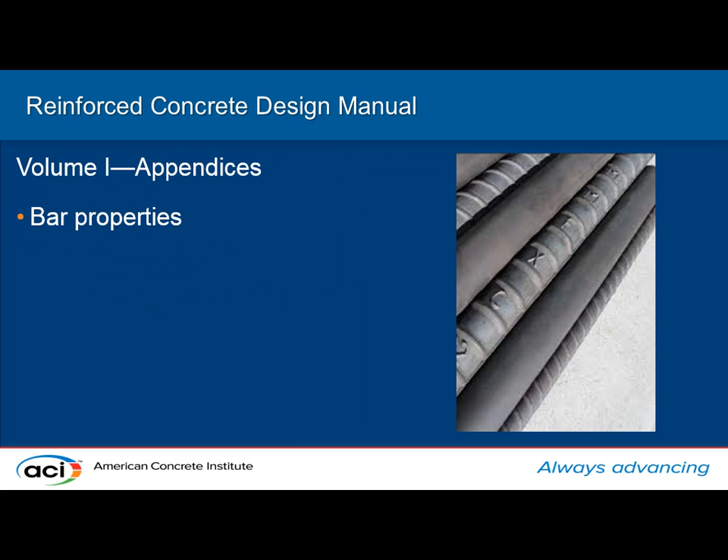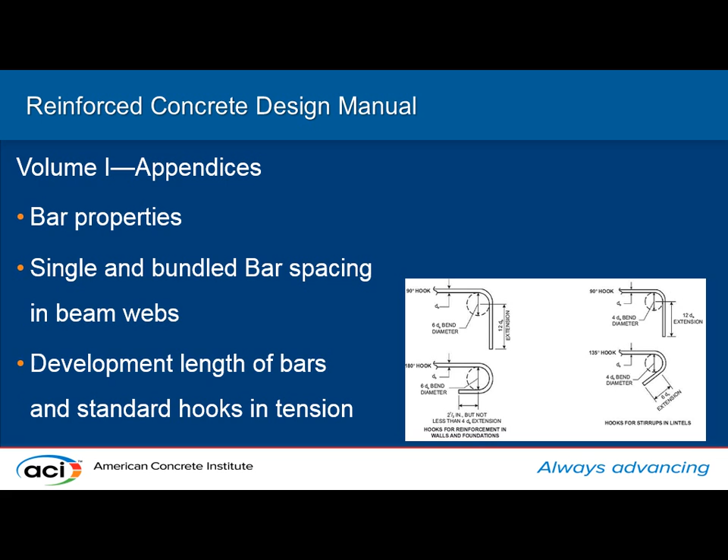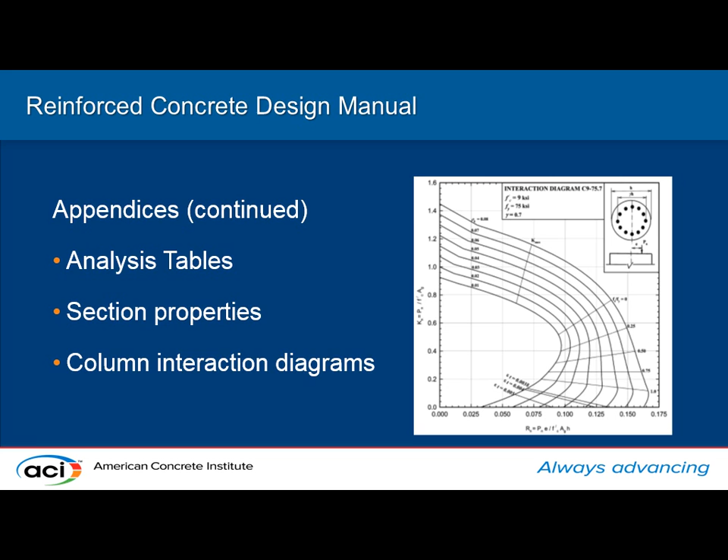In the appendixes for volume 1, we have tables for bar properties. We also show, for example, the maximum number of bars that can be placed in a beam, as well as development length of bars and standard hooks in tension tables. There are also analysis tables, section properties, and column interaction diagrams. Those used to be within the manual; they were taken out and put in the appendix.

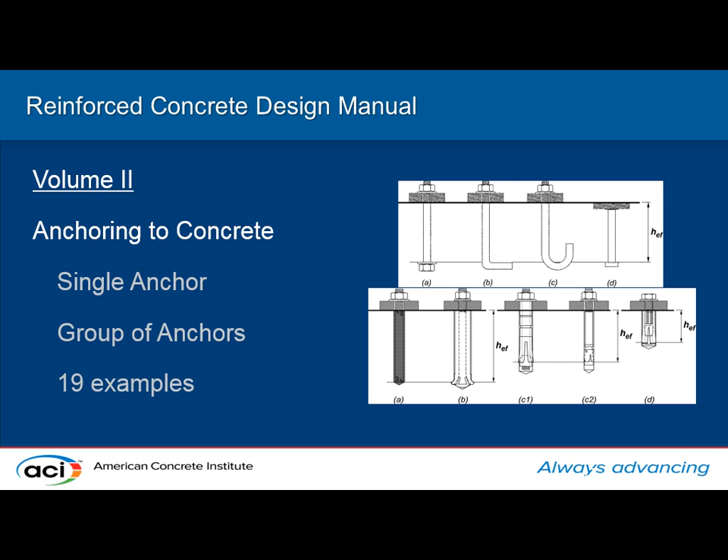Volume 2 is anchoring to concrete. It's a separate volume because there are about 19 examples, so it's quite lengthy, and it's divided into single anchors and groups of anchors. The single anchors have 3 topics: tension only, shear only, and combined tension and shear. Each has about 3 to 4 examples for that type of anchor. For example, tension has cast-in anchors, post-installed mechanical and post-installed adhesive. In a few of those, we also have examples with hooked anchors.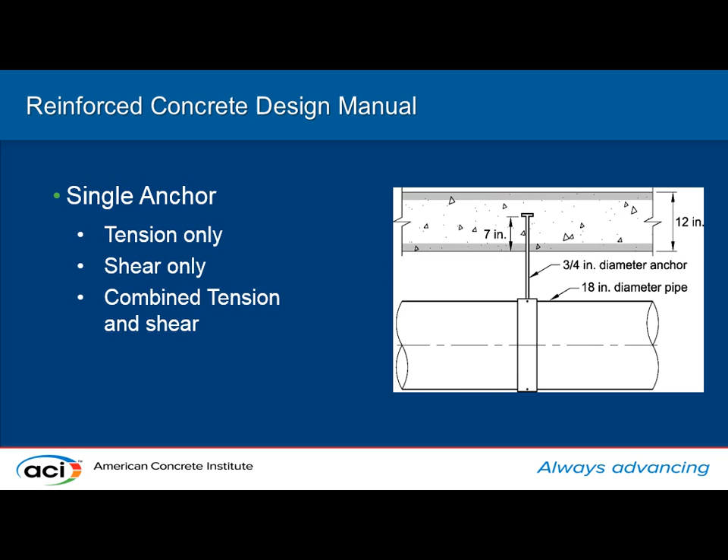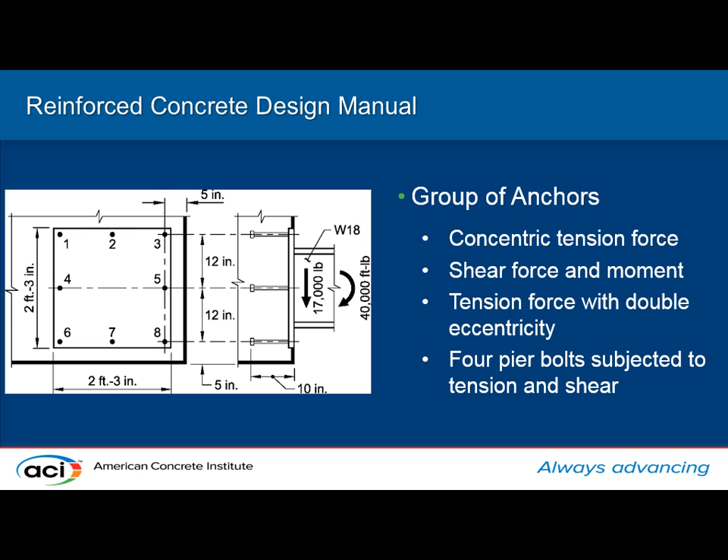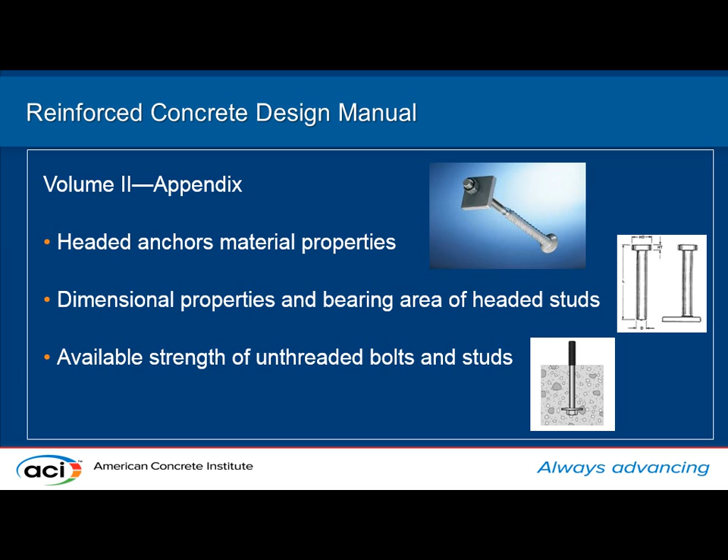For a group of anchors, we have concentric tension force, shear force and moment, tension force with double eccentricity, and 4 pier bolts subjected to tension and shear. In the appendix, there are useful tables for headed anchors: material properties, dimension properties, bearing area of headed studs, and so forth. Here, available tensile and shear effective strength of threaded anchors. We also have sample data for torque-controlled expansion anchors and post-installed adhesive anchors.

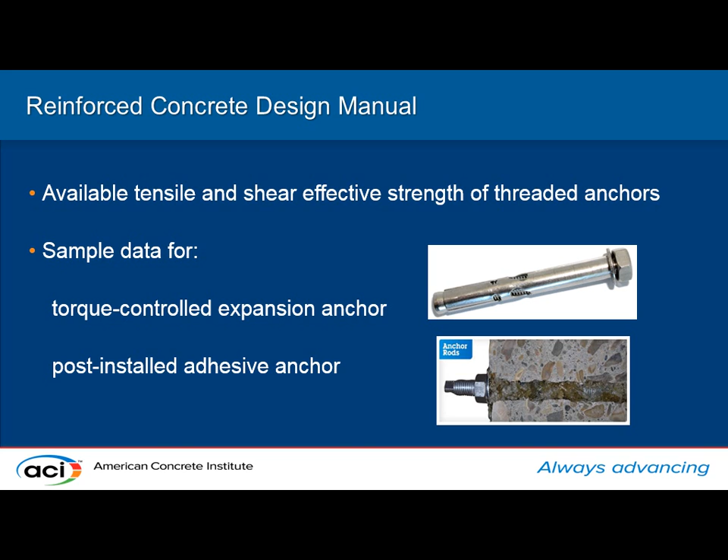Those data are fictitious; as an engineer, you need to get those data from the manufacturer. Although they are realistic, an engineer should go to the manufacturer to get those data. It's just a sample to show what data need to be obtained in order to design your anchor.